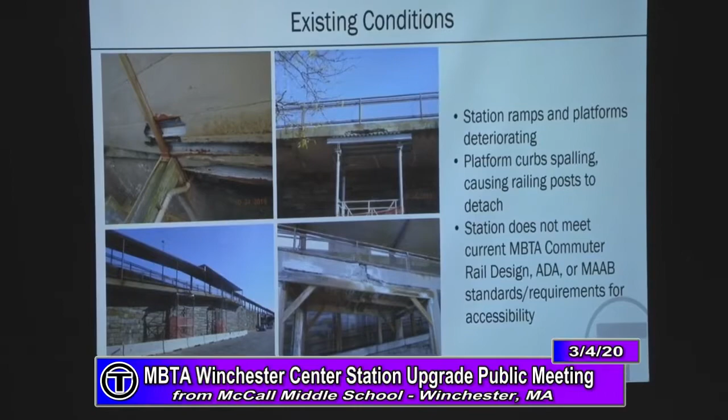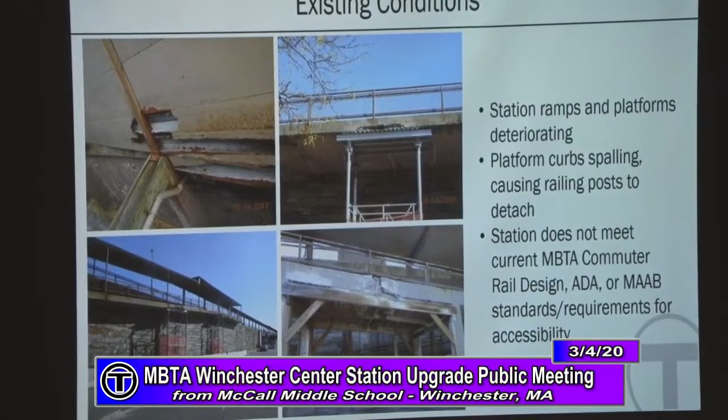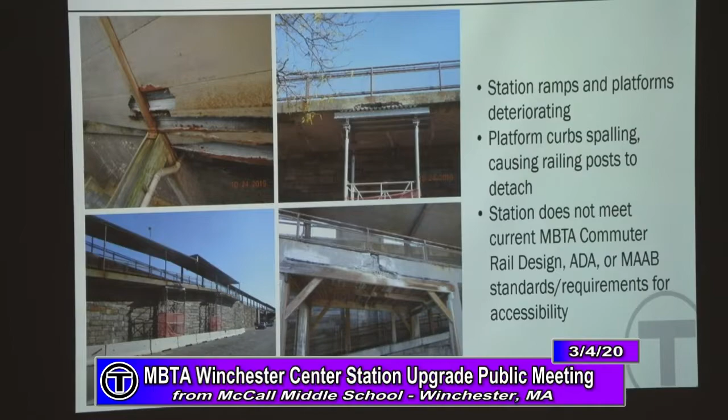Just before I get started with that, I want to talk about the why. As many of you are aware, the existing conditions at Winchester are deteriorating. The current station was built in the mid-50s, along with the viaduct that was built at the same time by Boston and Maine. The grade separation project was a huge undertaking at that point, separating the rail grade from road traffic. So in the mid-50s, you have the station basically that you have today. There's been very little improvements, some patchwork repairs, and the station remains essentially untouched for the past 65 years.

As you can see in these photos, we have undertaken some light repairs. The latest were done in December 2018. The station is experiencing efflorescence of the concrete. Roofs are blistering and peeling of the canopies. The walls are stained, there's deterioration in general of the station. If you've been up on the platforms at all, or you can see it from the sidewalks, it's due for an upgrade. It's overdue, and so we are excited to coming back to Winchester to build a new station.

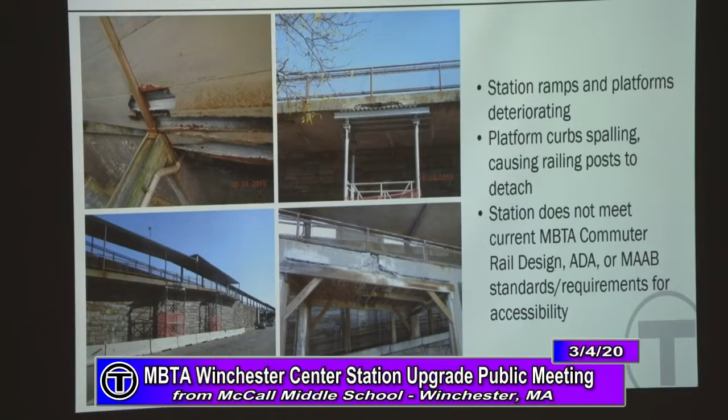Just before I leave this slide, I just want to update you on last November. I told you about the quarterly field observation reports that we are undertaking. These are not structural reports, they are observations only. The situation of the station remains more or less unchanged. However, if we do have to go through another winter, we do want to start construction in the fall. But if the station had to experience another winter with wear and tear of a New England winter, we would have to put more money, essentially more Band-Aids on top of Band-Aids. It's something that we obviously don't want to do anymore, and we want to get to building you a new station.

So I want to talk about the what now. What are our goals in designing something? If you want to renovate your kitchen at home, you have an idea of what you want to do.

Just briefly through this slide, I think a lot of you might have seen it last time. Safety is the number one goal in our design decision-making efforts. We're talking about lighting, emergency lighting, security cameras at the platforms, passenger assistance telephone, these sort of design features that bring the station up to code in terms of MBTA standards.

Secondly, accessibility. Accessibility is the main driving force for the design of this station. If you are at Winchester Center now, you have to climb down to get to the platform from the coaches. So what we want to do is have level boarding, so you just walk straight out onto the platforms and into the trains. This renders the Winchester Center much more accessible for those with accessibility needs.

Along with that, we have new pedestrian bridges, ramps that are up to code. The current ramps do not meet code. We are installing elevators, one on each side at the south end, at the Aberjona and Waterfield lots.

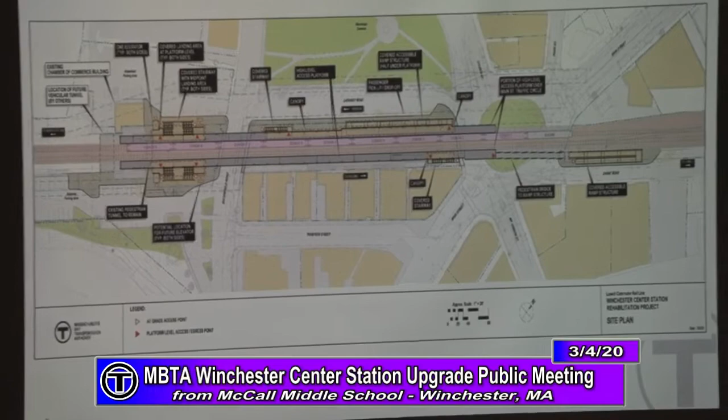I want to run you through now briefly the station, how it's laid out, so when we talk about these terms of where things are later on, you'll know.

Going to the left is towards Boston, to the right towards Lowell. I'm just going to introduce you briefly on our design. This is pretty much more or less unchanged. There are some details that we'll talk about later. We generally talk about 3 sections of the project, or 3 areas.

First of all, we talk about the head house, or the Aberjona Waterfield area. Secondly, we talk about the midway point, this is the Laraway Road and Thompson Street areas. And the north side, where we talk about the Quill Rotary, the pedestrian bridge, and Shore Road.

In summary, in talking about what we're doing, we're building a commuter rail station. We're building platforms, canopies, stairs, ramps, elevators. The station is not staffed. There's no internal heated space for waiting. This is like many of our commuter rail stations, unstaffed, basically platforms and canopies.

There are some sensitivities, especially with Winchester. It is on a viaduct. You are 25 feet up in the air. We are building in the middle of your town with very close neighbors. So there are some other factors that do play into decision making in regards to construction and design selection.

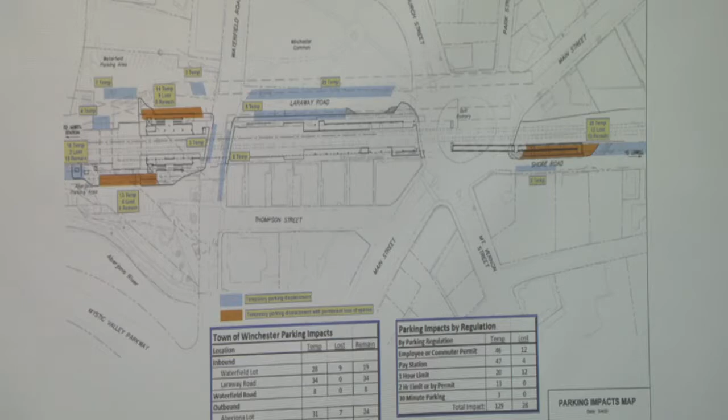Lastly, Shore Road, there are some permanent losses of spaces, and temporarily there will be some losses as well. We will not be closing off Shore Road for the duration of construction. Will there be a period of weeks and months with rolling stoppage of access? Yes, there will. I can't tell you right now for how long, but we need to get in there and build what we need and get out. It will not be for 28 months. Our goal is to keep it accessible as much as possible.

We're going to work with traffic. We have a traffic management plan we're putting together, which we're discussing with the town. We realize there are sensitivities with parking, closures, and temporary closures in your town, and we're trying to mitigate those. Station closure goes a long way in helping us get those losses down. Now I want to talk about the schedule.

We were at the 15% design phase in December 2015, approved by the town. 30% was also approved by the town in October 2016. 60% design was last November, and we're at final design now in March 2020. We anticipate procuring a contractor this spring, with award in the summer, and notice to proceed, so the contractor can start work in the fall of this year.

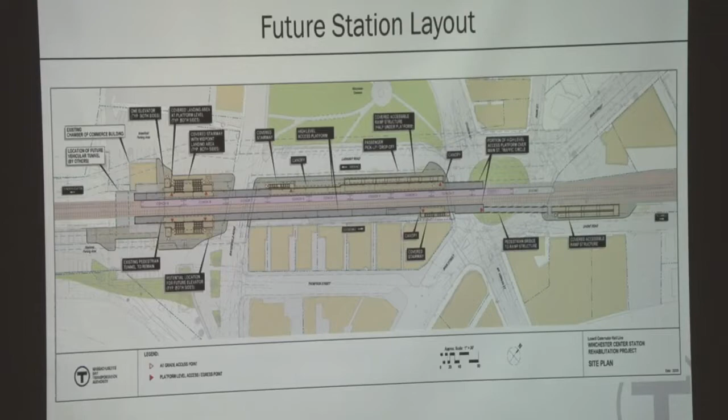The width of that sidewalk, for people who live here next to the old Nelson's, going towards Shore Road, that's a very, very narrow sidewalk. And the curb ramps are not ADA compliant in terms of what you really need for a landing at the top of a ramp. So you're putting in a beautiful new ADA compliant ramp coming down Shore Road, and the curb ramp and the sidewalk at the bottom of that is going to be lovely and compliant, and - oh God, I just broke the thing. We understand what you're saying, yes.

Anyway, what I'm saying is you're telling me MBTA isn't responsible. You've got a nice curb ramp and a sidewalk on one side of Shore Road, but when you cross the street, you can't get up properly. So I would like the town to work with the MBTA and figure out how to make this work, because the functionality for people coming off that ramp, in particular people who have ADA issues, to get back towards town is really, really quite frankly dangerous.

It's not a safe area in terms of having a walker or a wheelchair or whatever.

Okay, thank you. Thank you.

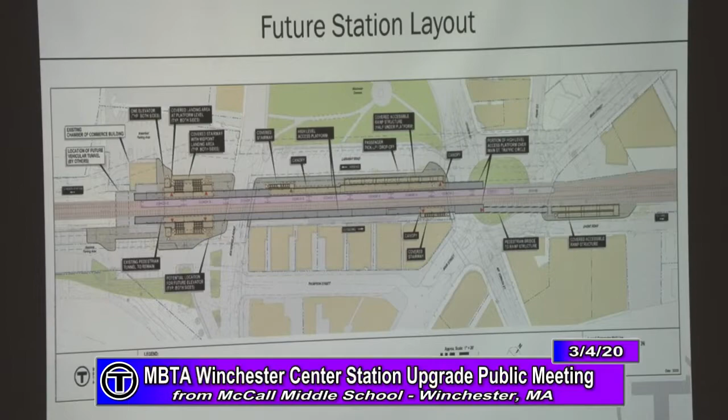So briefly, there were comments about covering the bridge with the working group. It was decided that we would not cover the bridge. I understand that - you get to that certain point and then it's not covered. You go off the ramp, it's covered. You get to the bridge, it's not covered. But then you're onto the platform, it's also not covered in most areas, some areas it is. So you either cover the whole thing or you don't, and then people look at it and ask why'd you cover this bridge. Aesthetics comes into play.

So Mount Vernon, we have to - and we have heard that from the town, yes - Mount Vernon, we have to control the scope. Do we do this curb? Do we do that curb? Do we keep going? How far do we go? We have to draw our boundaries somewhere on construction. We would love to fix all the problems, we just can't, given the constraints that we have.

Shore Road, thank you for your comments about keeping it open during construction with pedestrians.